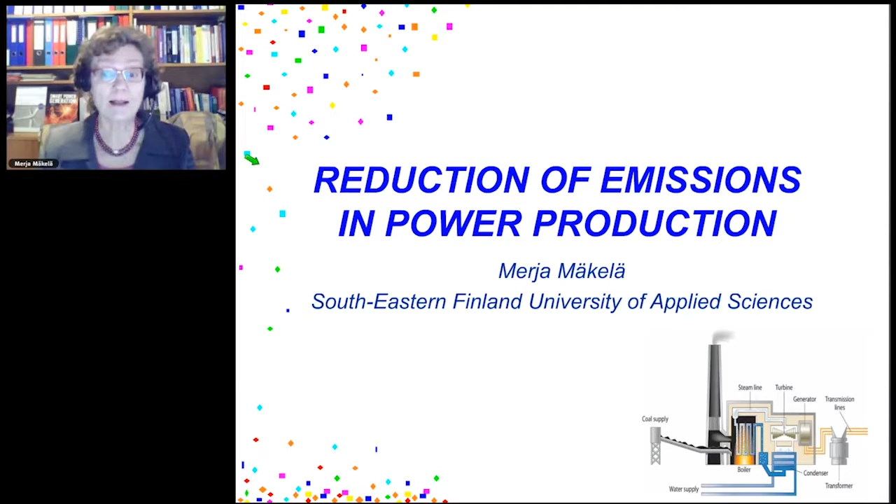In my presentation, I have three parts. Firstly, I have a small introduction. Secondly, I come to the main topic, combustion technology and emissions, and finally, I have my conclusions. Firstly, this introduction.

The Directive 2010/75 of the European Union for industrial emissions makes the general framework for industrial emissions. This directive is applied to energy production, metal production and processing industries, minerals processing, chemicals industries, waste management, pulp and paper production, slaughterhouses, the intensive rearing of poultry and pigs.

There is a second important document, and this is called Best Available Techniques Reference Document for Large Combustion Plants. This has been updated in 2017, and this document gives the general techniques to prevent and reduce emissions and their consumption.

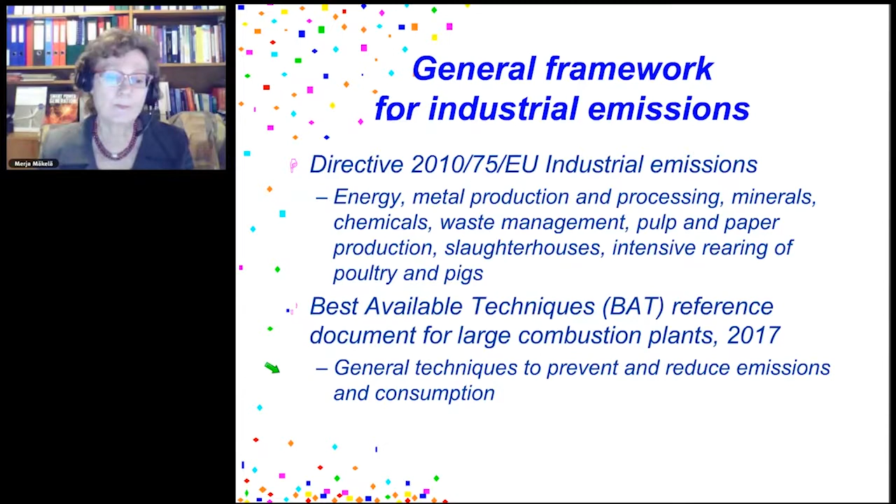We get toxic and harmful emissions from combusting power plants. We always get carbon dioxide from combustion. In addition, we may get more or less nitrogen oxides, sulfur dioxide, particulate matter, persistent organic pollutants, and heavy metals.

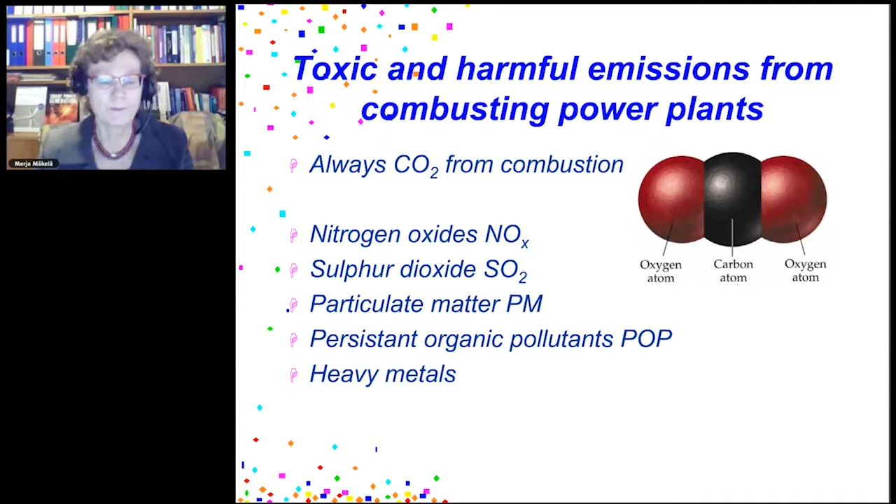There are many challenges in power supply. There are tendencies to reduce fossil fuels due to the limited natural resources in our world. There are trials to reduce carbon dioxide emissions because of the global warming. The availability of feasible fuels varies from country to country.

This figure on the left side presents the total energy consumption in Finland in 1990 to 2015. With the blue color, you see the part of fossil fuels used in power supply. With the magenta color, you see the renewable sources used for the power supply. With the turquoise color, you see the nuclear power part in the total consumption of Finland.

This renewable part makes about 40% now, and 30% comes from wood-based fuels, and 10% from hydropower, wind power, and solar power.

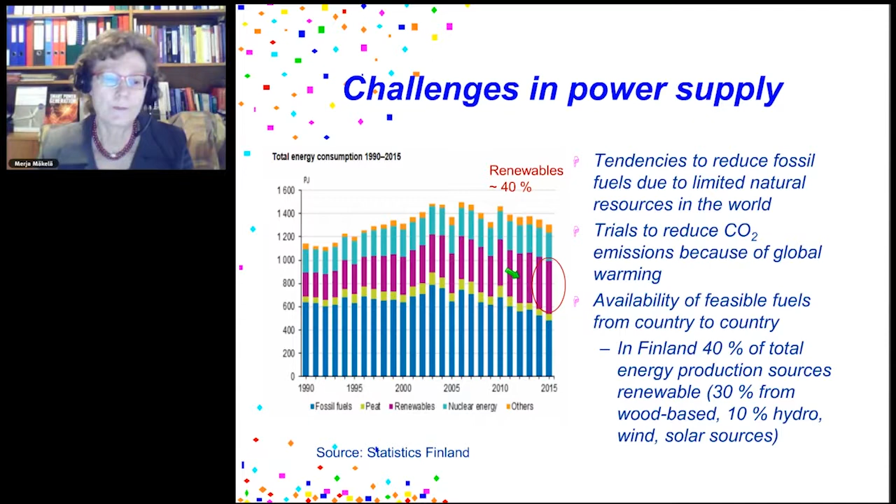In this figure, also given in petajoules, you see the renewable energy sources of Finland from 1970 to 2015 in some more details. When we start here on the bottom, using the blue color, it's presented the part of hydropower; it makes about 15% or a little bit less. Then another 15% comes from small-scale wood combustion.

Then this magenta color gives the part of black liquor. Black liquor comes from pulp mills. Black liquor contains compounds from wood, and it contains a lot of energy, and black liquor is combusted in recovery boilers in order to recover chemicals for further usage. And in that combustion, a lot of energy will be produced.

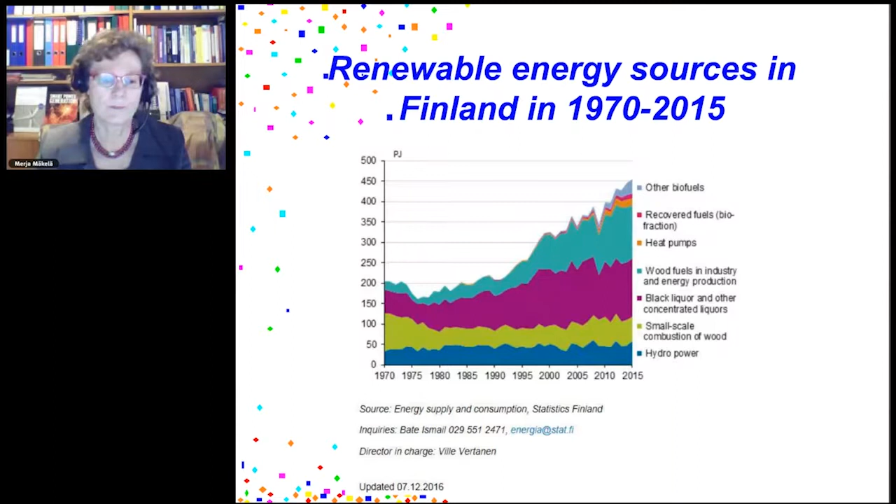In this figure, you see the progress of carbon dioxide emissions from 1990 to 2016. The emissions are given in million annual tons carbon dioxide. The emissions in Europe, given using this yellow color, and in the USA, given with a blue color, have been gradually decreasing after 2000, but not that much.

The situation in China looks different. After 2000, the emissions have been increasing because of more industrial activities and also more vehicles in the transport. During the last years, there is a slight change in that direction of decrease.

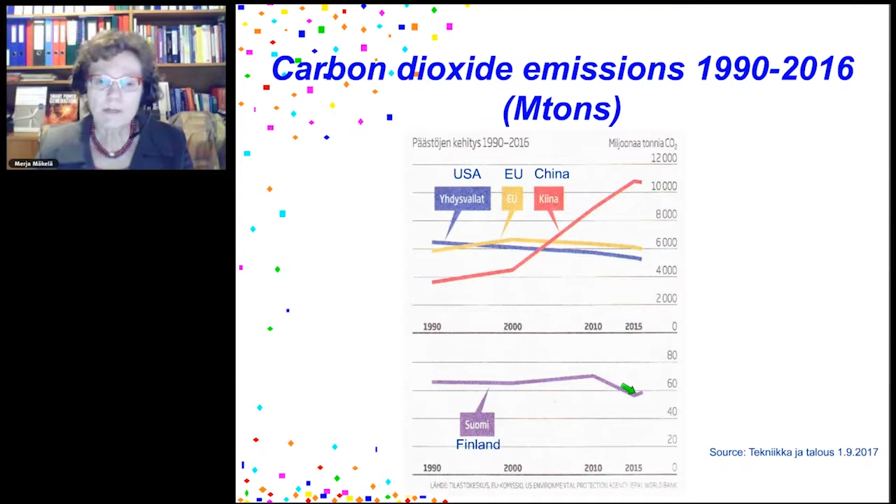Next, I come to the combustion technology and emissions. This is the main topic here. In this figure, you see a simplified scheme of power production using combustion. On the left side, the fuel is coming in. In this case, coal is coming in to the furnace where it's combusted.

This combustion makes heat, and this heat boils water in the water circulation and makes high pressure steam. This high pressure steam comes to the turbine where it releases heat and condenses and makes the generator rotate, and we get electricity. This condensed water comes back to the water circulation. From the combustion, we get flue gases, and in flue gases we have harmful and toxic emissions, and we have to be able to reduce them.

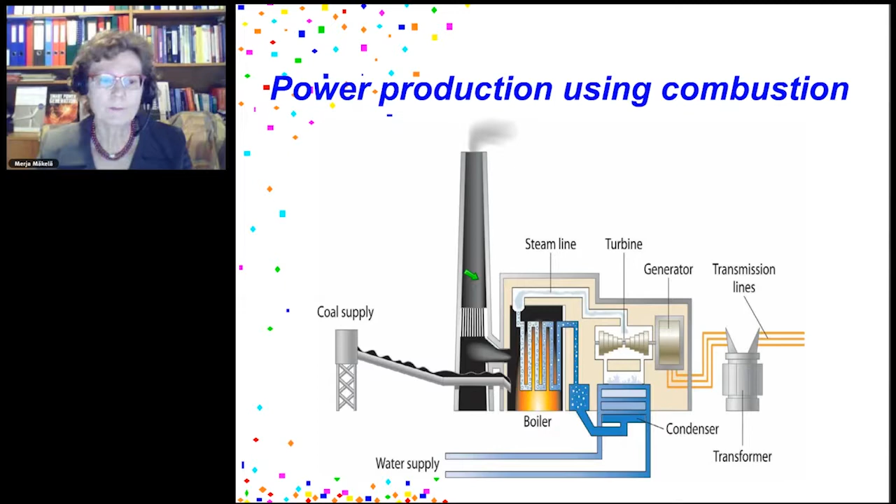There are three basic principles how to reduce emissions in combustion. We should use cleaner fuels and combustion processes. That makes the basis. Secondly, we should utilize improved combustion technology, and these methods are called primary methods to reduce emissions. Thirdly, we are able to treat flue gases, and these methods are called secondary methods in order to reduce emissions.

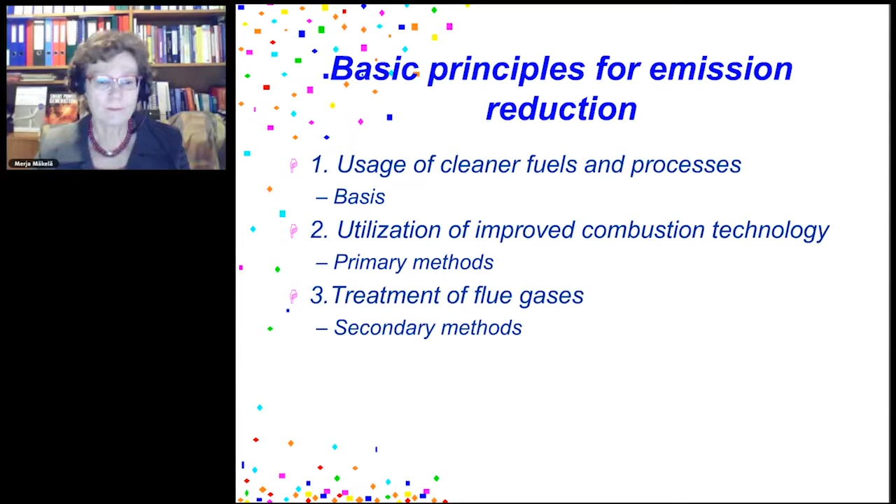When we use cleaner fuels in combustion processes, it looks like this with some fuels. We get less emissions from biogas and from natural gas. On the other hand, we get significant emissions from some fossil fuels such as oil, coal and peat. We also get significant emissions from some renewable sources such as biomass and black liquor. We get harmful emissions from waste, but on the other hand, we like to get rid of waste.

We don't get any emissions from some non-combusting sources. We don't get emissions from solar power, wind power, or hydropower. We don't get emissions from nuclear power, but there are problems with radioactive waste. We don't get any emissions from geothermal heat.

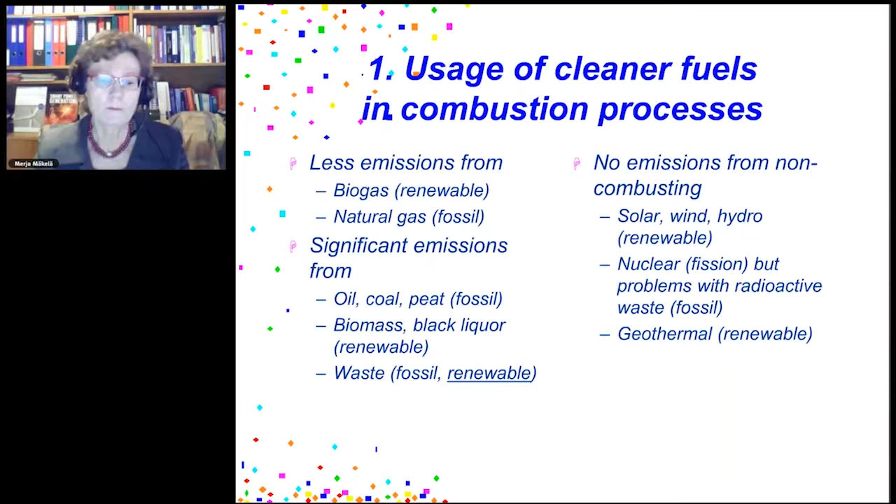We are able to utilize improved combustion technology. In this case, there are two basic mechanisms to improve combustion. Firstly, we may regulate the feed of air. This means the feed of combustion air. We may also regulate the fuel feed. Secondly, we may use lower combustion temperatures, and this can be realized, for example, by circulating flue gases. And this method is especially used in circulating fluidized bed combustion.

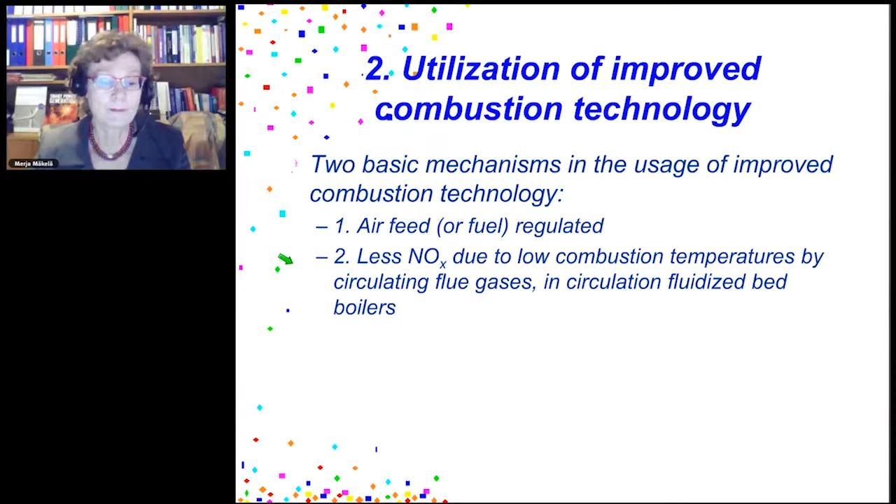This third method covers different ways to reduce emissions. We may get less nitrogen oxides when we inject ammonia to the combustion, to the furnace. We get less sulfur dioxide when we add calcium carbonate. We get less particulate matter when we use electrostatic precipitators. We get less particulate matter when we use fabric filters. We are able to get less sulfur dioxide, sulfur trioxide, hydrogen fluoride, hydrogen chloride when we dose activated carbon and slaked lime, this calcium hydroxide.

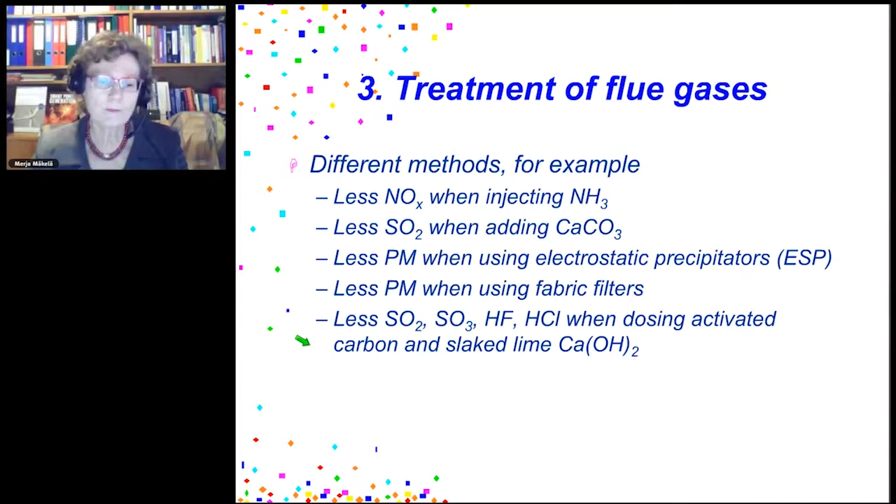We get harmful nitrogen oxides from combustion. Flue gases contain about 95% nitrogen monoxide and about 5% nitrogen dioxide. These nitrogen oxides come from the fuel's nitrogen and from the nitrogen of the combustion air. The produced amount of nitrogen oxides depends on the reaction mechanisms of fuels and oxygen, and also the availability of oxygen in different combustion zones. The mechanisms are rather complicated, but they are well known.

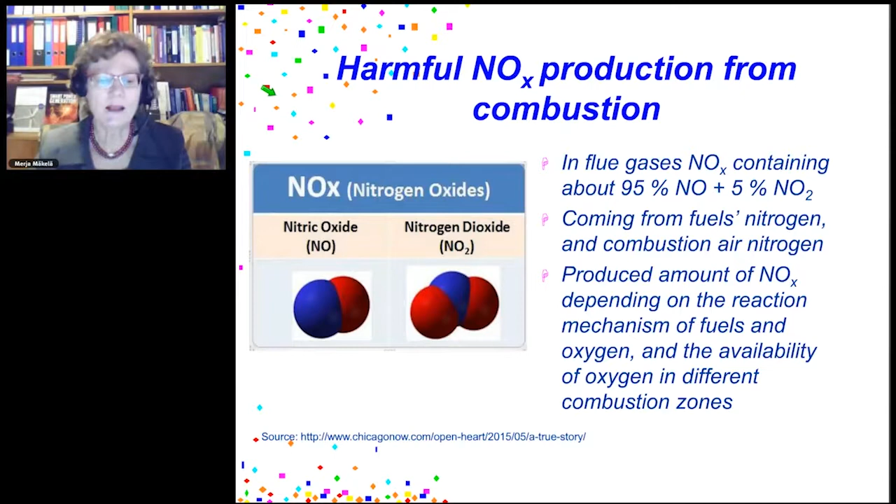Next, I come to the main combustion methods. Burner combustion is widely used. We use dust with air, we may use fluids, we may use gases, especially fuels with high heating values and uniform quality, such as oil, natural gas, and coal. We may use grate combustion. Today, this method is mostly used in waste burning incinerators. Those combusting power plants burn municipal waste.

The third method utilizes fluidized bed combustion. This is widely used when we have multiple fuels with low and varying heating values, and the combustion takes place in fluidized sand beds.

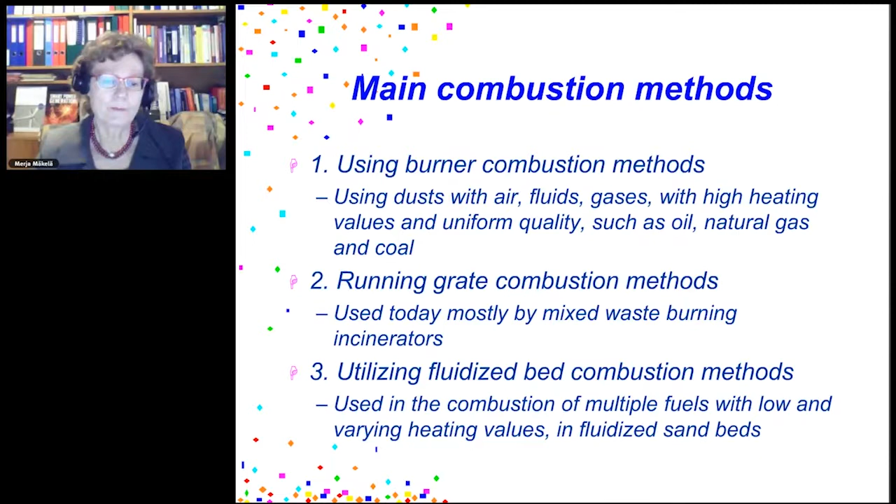This figure presents a biomass combusting power plant. We have a storage for biomass here on the left side, and we feed the fuel into the furnace. This power plant uses fluidized bed combustion. The combustion makes heat and boils the water in the water circulation, and from that steam we get electricity in the generator. This condensing steam becomes water again, and it releases heat, and we are able to use this heat for the district heating network.

We feed some additional water there. Ashes can be utilized if possible. The combustion makes emissions, and we have to be able to clean them. We like to reduce harmful and toxic emissions.

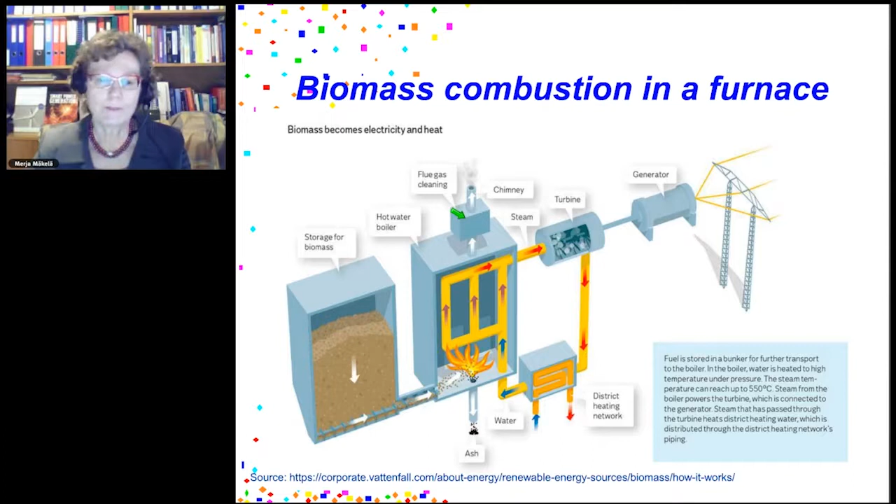Finally, I come to my conclusions. Harmful and toxic emissions coming from combustion can be reduced using clean fuels, advanced combustion methods, and cleaning methods.